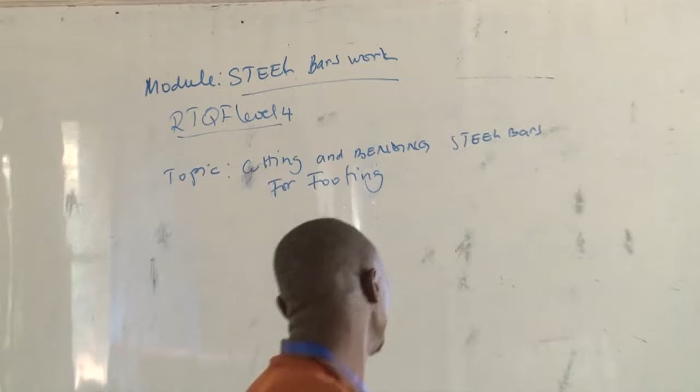Topic of today is about cutting and bending steel bars for footing. Yesterday we discussed about cutting and bending steel bars, especially for column. That's why now we are going to discuss about cutting and bending steel bars for footing.

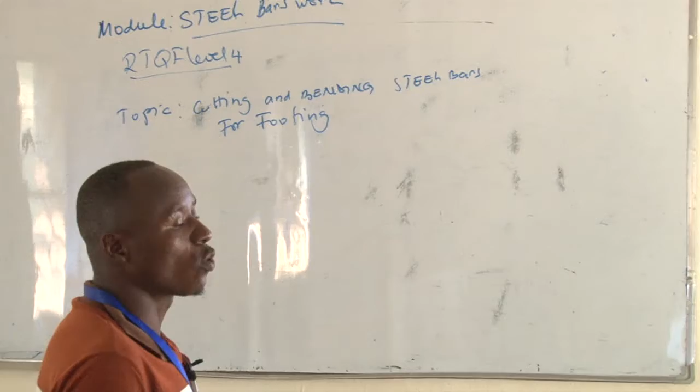Of course, there are some objectives for this course. At the end of this module, a learner should be able to know how to bend the steel bars related with footing. Now let's start with PPE to be used in steel bars work.

We have protective gloves, protecting our hands while we're working with steel bars. Then hearing protection, just to protect the ear from the noise.

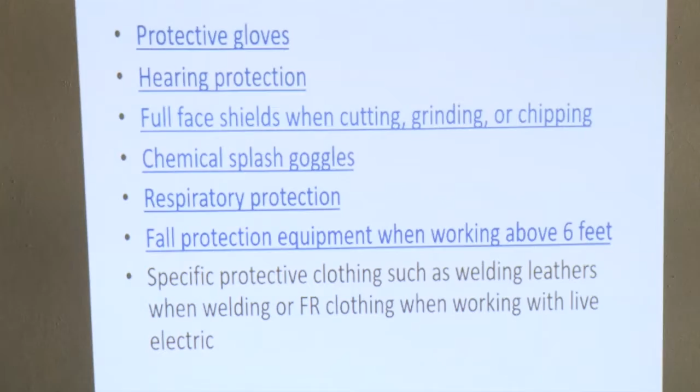Then full face shield when cutting and grinding, which also protects our face. And chemical splash goggles and respiratory protection.

Those are masks that we put on for respiratory organs in order to protect our respiration. These are the protection equipment used when working with steel bars.

Now let's discuss selection and use of tools and equipment for steel bars work. After protecting our body, now let's enter the work to select the materials or equipment to be used while bending and cutting the steel bars, especially for the footing.

Then the selection of tools. Let's start with classification of tools and equipment for steel bars work. It is what we call straightening tools and equipment.

Those are the tools we use just to straighten the rebars or reinforcement we use in construction. It is what we call hammer and straightening machine, the machine we use to straighten it.

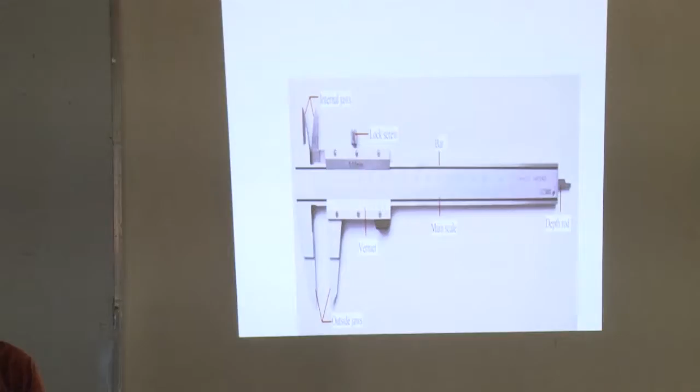Now, that figure we see on the projector is what we call a vernier caliper. The vernier caliper is used to take a measurement of a small thing, where you can't just measure by using a tape measure and other measurement tools.

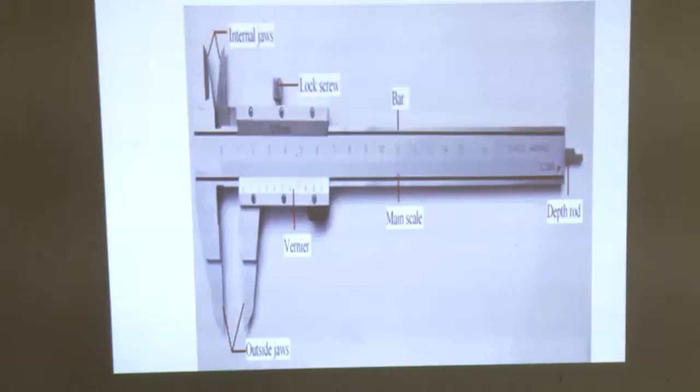It's called vernier caliper. Different types of steel bars: here in Rwanda we are using two types of steel bars, what we call mild steel bars and deformed steel bars, or twisted steel bars.

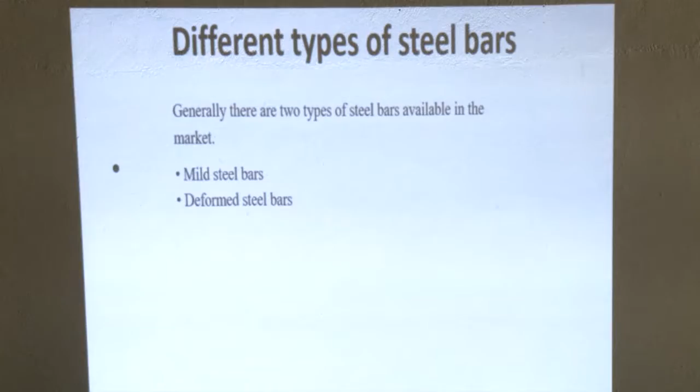Mild steel bars are the steel bars whose last surface is smooth. Whereas the deformed steel bars are the bars we are using whose last surface is somehow twisted.

Then, types of steel bars we are using. This mild steel, as I have said, mild steel bars are used for a tensile stress of the RCC, reinforced cement concrete, slabs, beams, etc. That is where we are using these mild steel bars, especially for reinforced cement concrete, slabs, and beams.

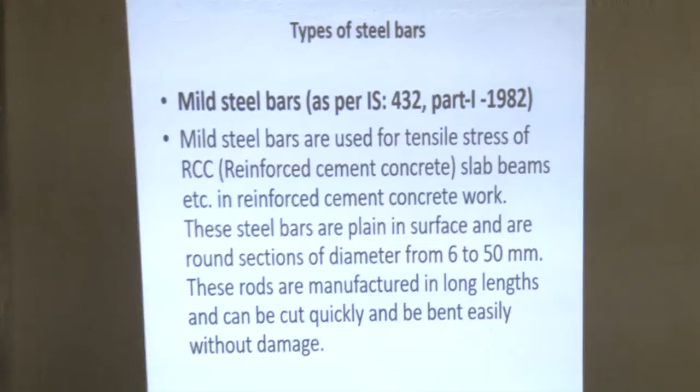Once we say slabs, it is like a pavement of the multi-story buildings. And the beams are horizontal members of the structure designed to support the structure from the slab and the load from up the beam.

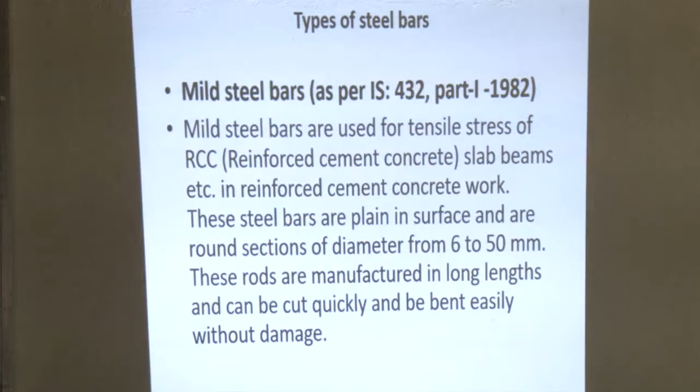Then let's go to the desired sizes of reinforcement we have found in the Rwandan market.

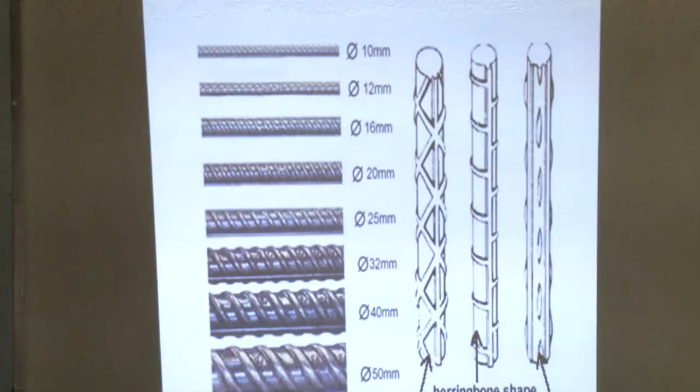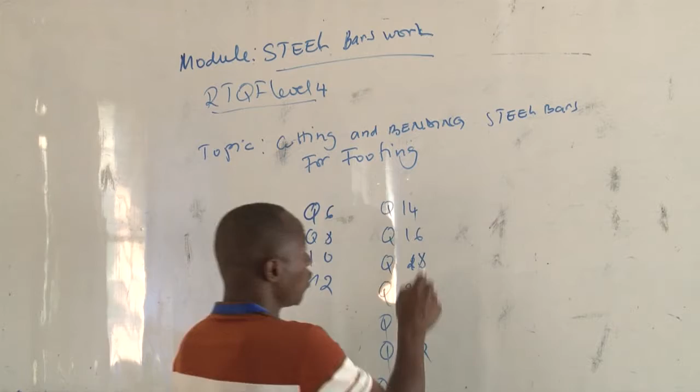At the Rwandan market, we are seeing different sizes such as 6, 8, 10, 12, 14, 16, 18, 20, 25, 32, and 40. Those are the sizes of reinforcement we are seeing here in Rwanda at the Rwandan markets.

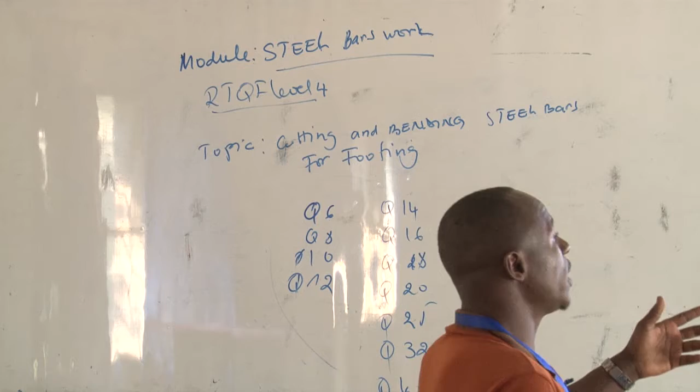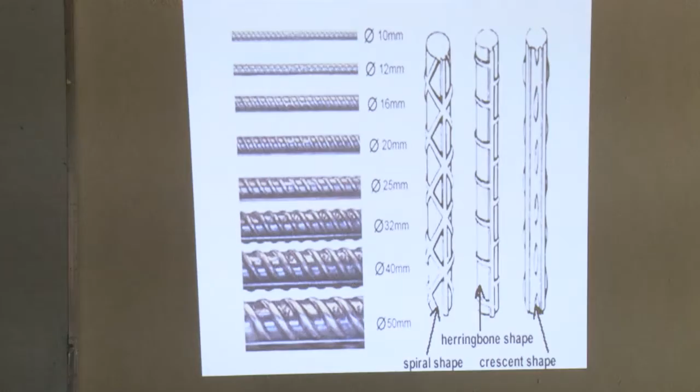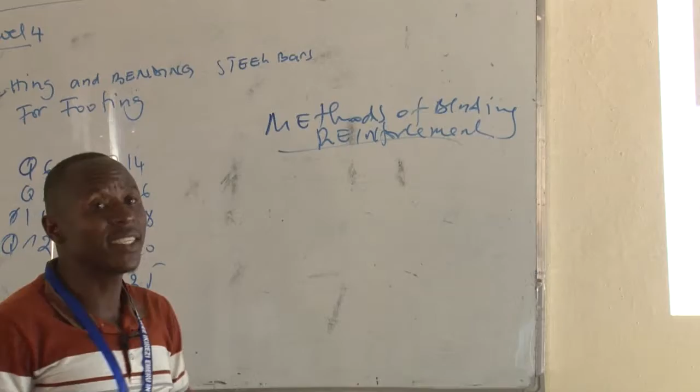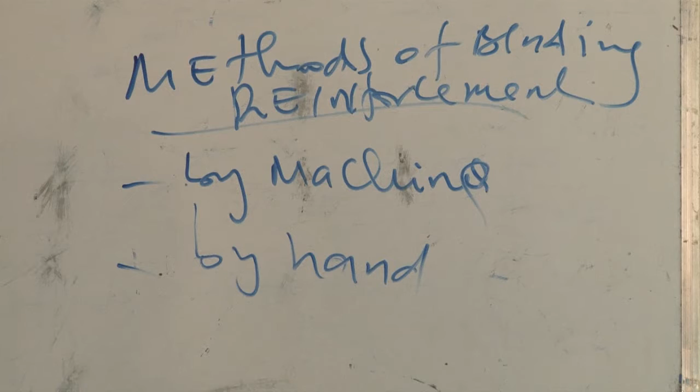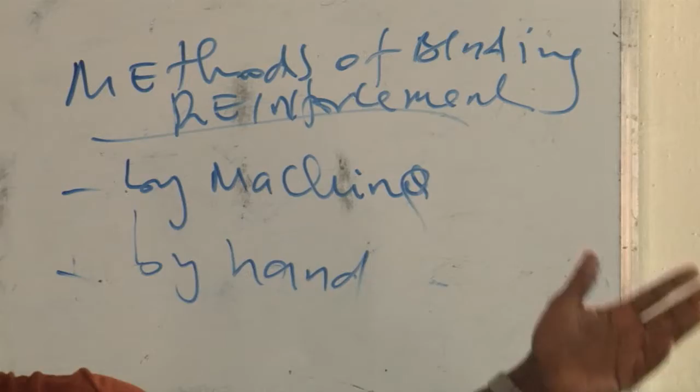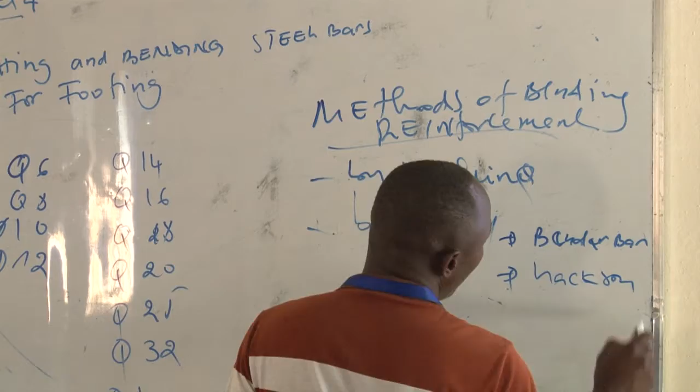The method of bending reinforcement is done in two ways. The first is by machine. The second one is by hand, where it is man-made, I mean. Now, by machine, it is done by those people using that bending machine. Whereas by hand, it is done using what we call bender bars. Bender bars and hacksaw, as you have seen in types of materials to be used. Then, now, let's go on.

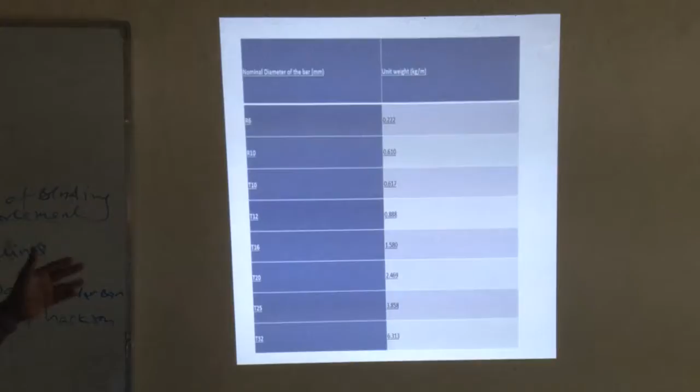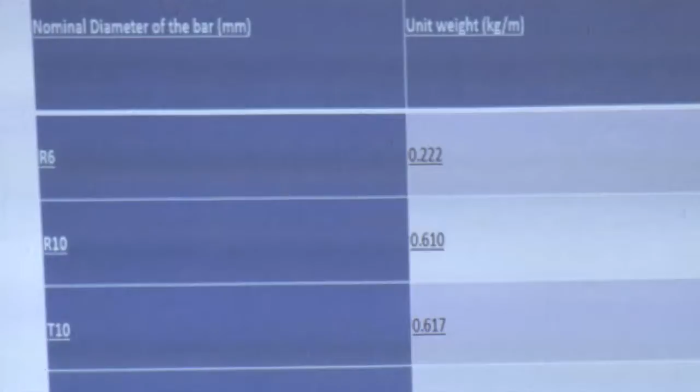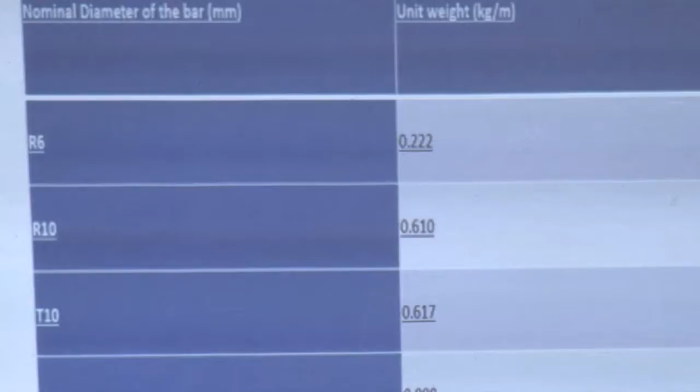Also, those are the sizes of reinforcement found at one market and their unit weight. For 6 reinforcement, it has unit weight of 0.222 kilogram per meter. For 10 reinforcement size, it is 0.617. For the steel of size 16, unit weight is that one. Also for 20, the unit weight is 2.469. For 25 it is 3.858. For 32 it is 6.31. Now let's go on terminologies used in steel bending and cutting steel bars.

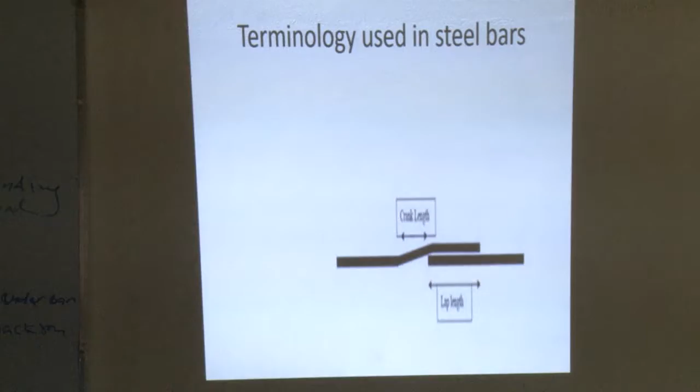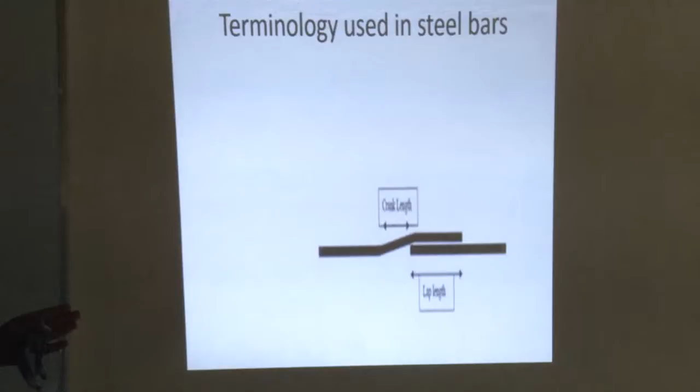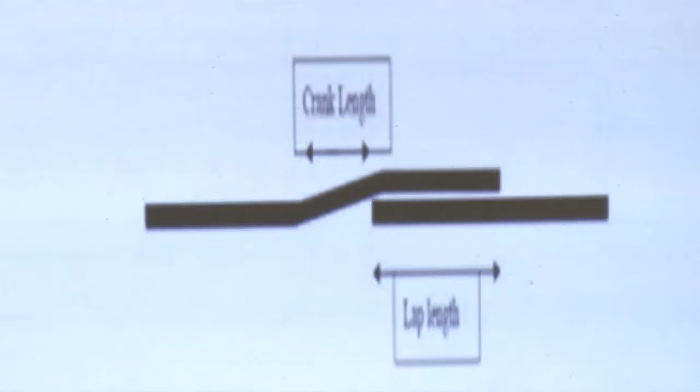Terminologies used. Here you are seeing the images. Those are just combining together, assembling together the two reinforcements. This one is what we call overlaps. What does it really mean, overlaps? Overlapping means just increasing the length of steel bars once your reinforcement is not enough to reach the desired length you want. That is what we call overlapping.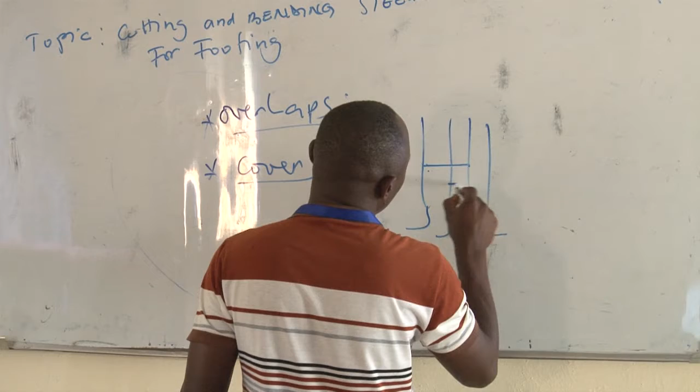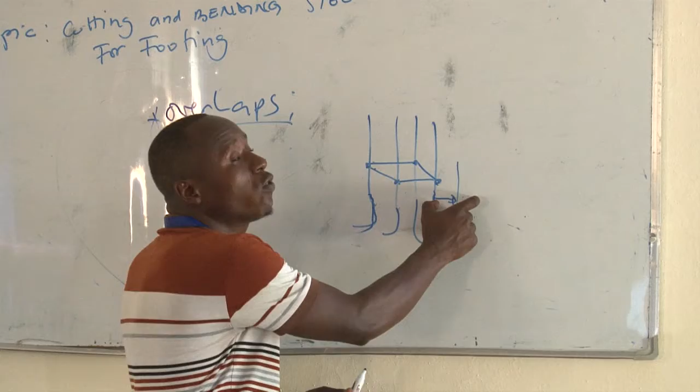The second one is what we call cover. Let me give you an example here. Cover is the thickness of concrete from the main reinforcement up to the last surface of the structure. To mean that it is the thickness of concrete after reinforcement up to the last surface of the structure is what we call cover.

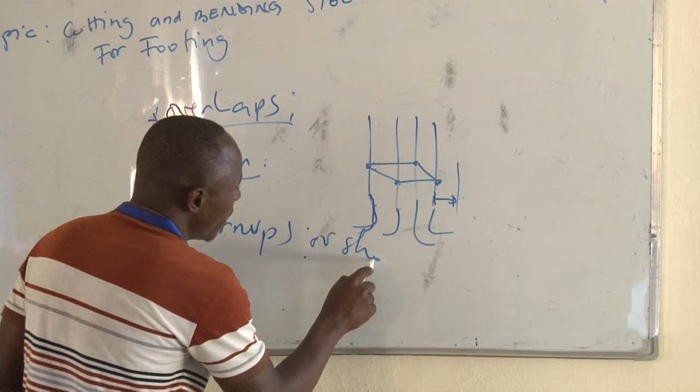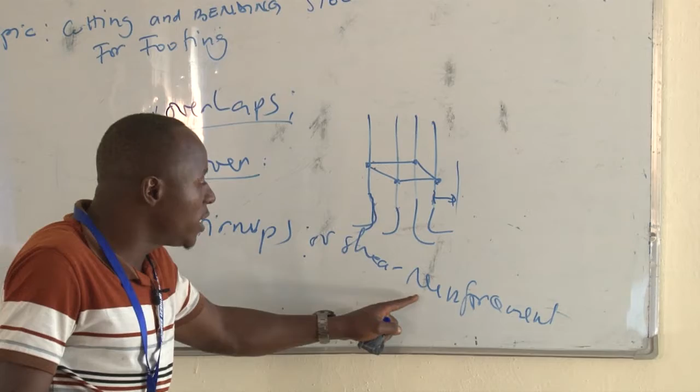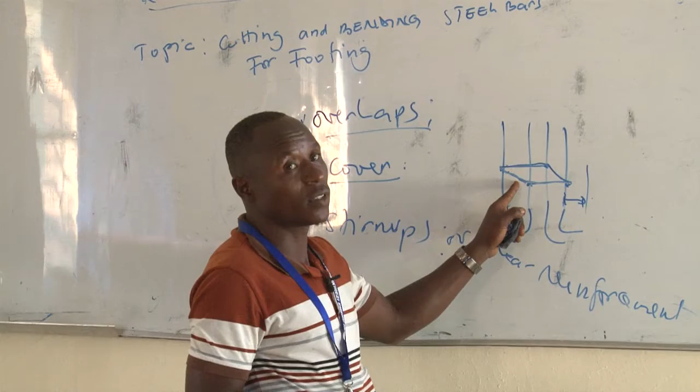And what we call stirrups. What really is a stirrup? It is called stirrups or shear reinforcement. Why do we call it shear reinforcement? Because it resists the shear force, to mean it resists the force which tends to cut it into two pieces. So stirrups, it is this one, in this sketch I've tried to draw on the board. It is used just to connect together the main reinforcement, to join the main reinforcement together.

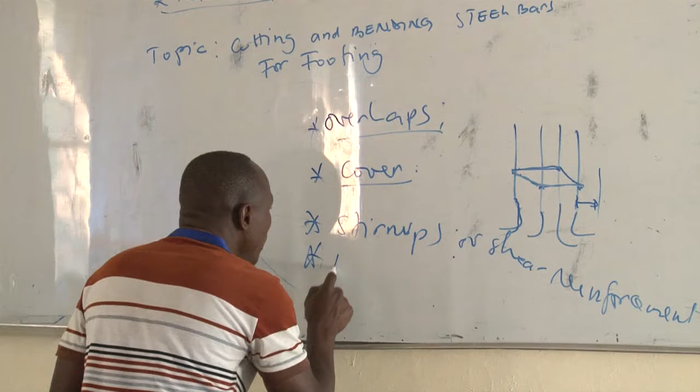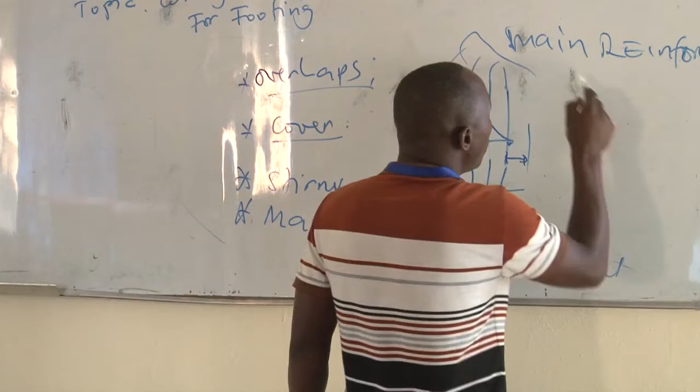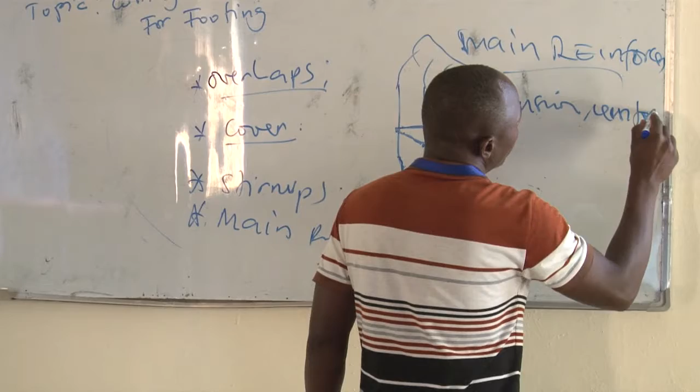What really is main reinforcement? The main reinforcement are the reinforcement we are using along the structure. For example, for this column, I used this one and this one and this one. Those are the main reinforcement. Among those main reinforcement, there is tension reinforcement and compression reinforcement. Tension reinforcement is ready to receive the tensile stress, whereas compression reinforcement are the steel bars ready to receive the compression force.

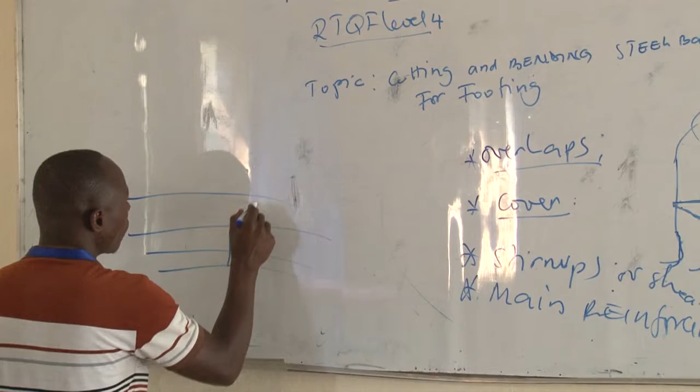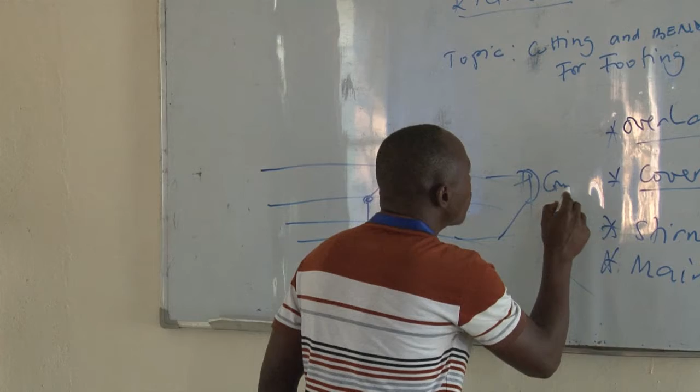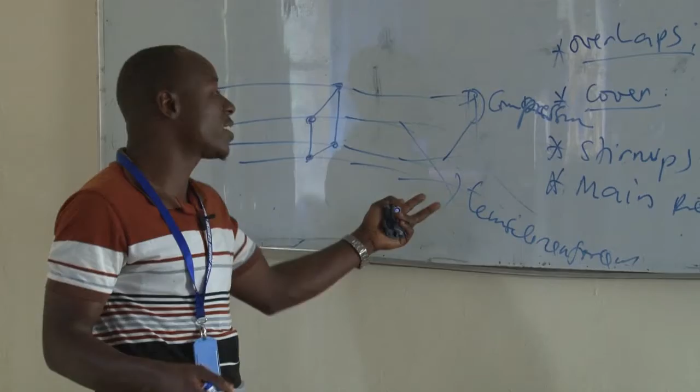I hope you understand the difference between tensile reinforcement and compression reinforcement. For example, if the structure is horizontal, this one at the top is what we call compression reinforcement, whereas this one and this one at the bottom are called tensile reinforcement. Instead of reinforcing at the top, of course, we reinforce more at the bottom, because the structure is likely to break down at the bottom.

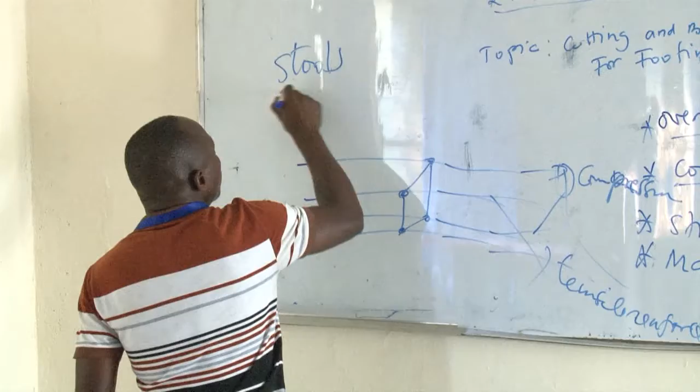Now, let's go on what we call the stool. What really is the stool? The stool is a reinforcement that we put between the two meshes, the bottom meshes and the top meshes. The reinforcement we tie to combine the top meshes and the bottom meshes is called the stool. When do we use these two meshes, the bottom meshes and the top meshes?

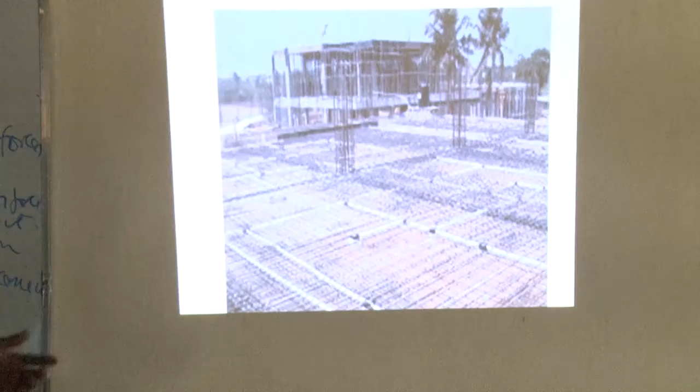It depends on the importance of the structure, or it depends on the behavior of the soil. Since the soil is weak, automatically you will double your structure with top meshes and bottom meshes. So the reinforcement you put between those two meshes is called the stool. Now, this is the image of steel bar work, where they are putting the stool between the top meshes and the bottom meshes.

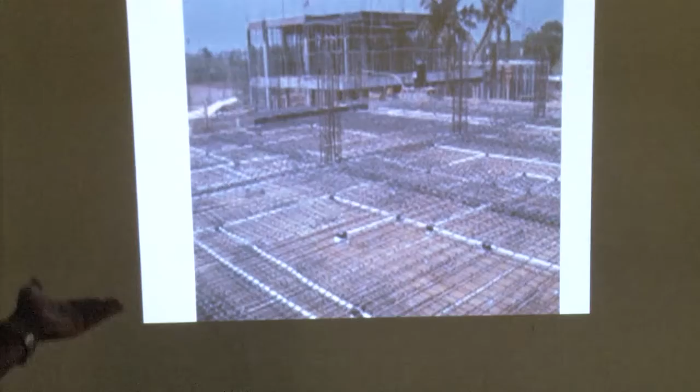So let's stop here and go to the practice to see the difference between cutting and bending steel bars work for the footing, and cutting and bending steel bars for the column. Yesterday we discussed cutting and bending steel bars, but for the column.

Today is about footing. What is really a footing? A footing is like a foundation of a column which is made in reinforced concrete. So that is what we are going to see there.

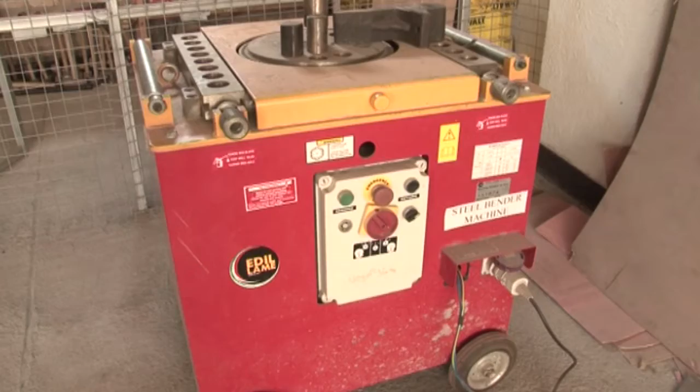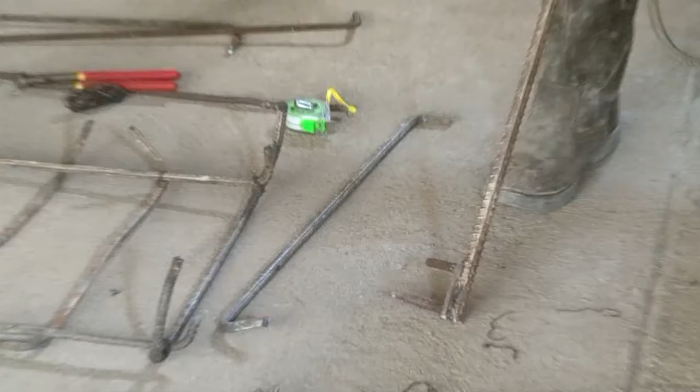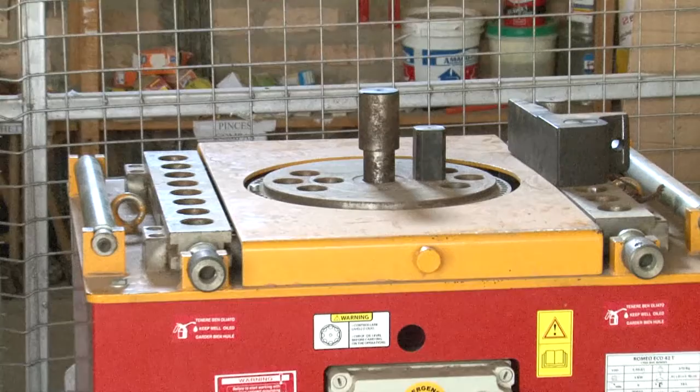We were in theory. Now in practice, we are going to see how to bend the steel reinforcement related with the footing. As I have said, you may bend the reinforcement in two ways: by hand, where we use bender bars, this one, and by machine, where we use this one, the bending machine. But for us, we prefer to use this machine because it is more accurate than using hands.

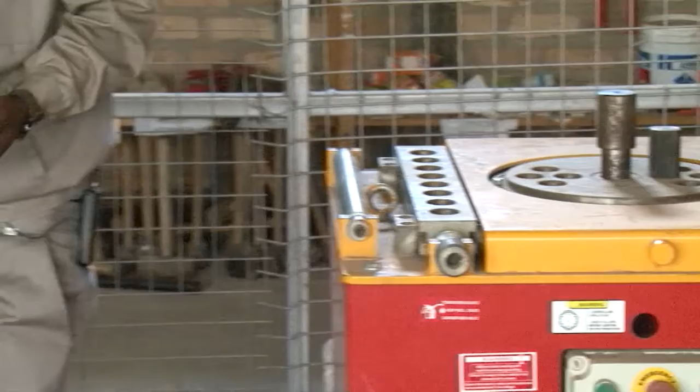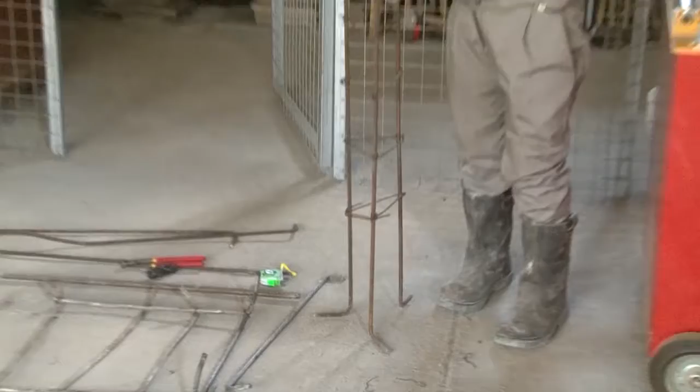So we are using this machine to make hooks. For making the stirrups like this one, it is done by hand. But for making those hooks, it is better to use the machine, because sometimes you may bend reinforcement sized around 25. It is somehow hard, so bending them by hand is difficult. So it is better to use the bending machine.

So today, let us try to bend those reinforcements of the footing.

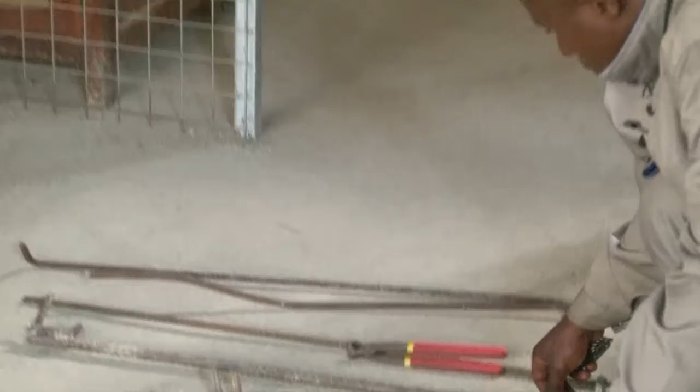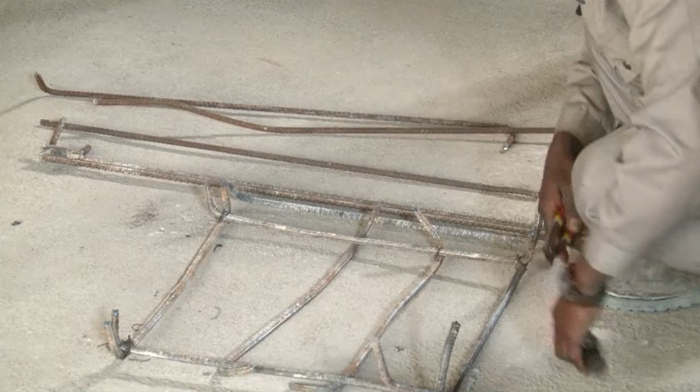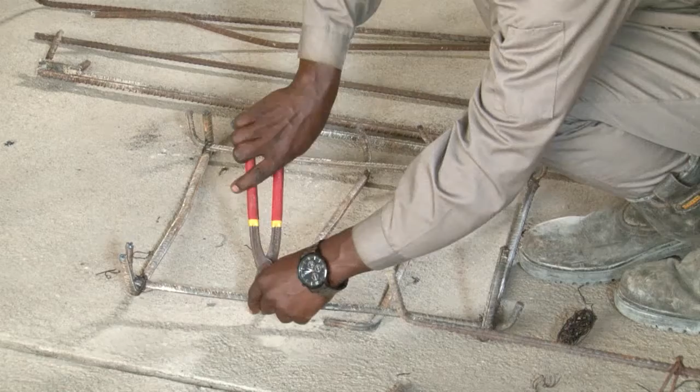In tying them together, of course, you need to tie them by making an 8, in order to tie them together as expected, so that your reinforcement is more rigid and can't come apart.

This one I'm using is called the pliers. It is often used at the site, and these are called wires. I use them just to tie them together.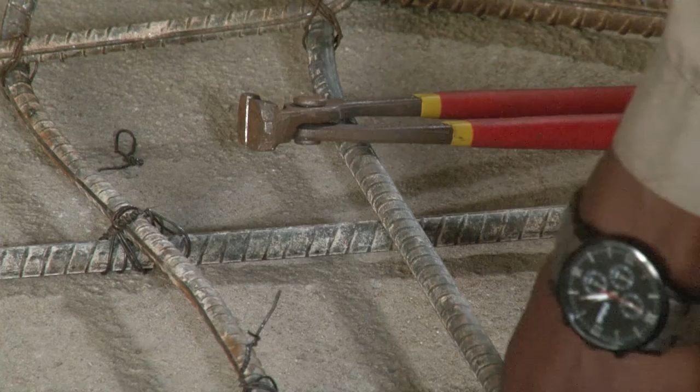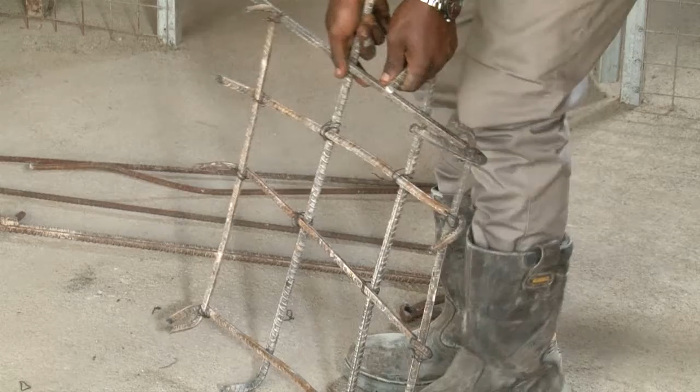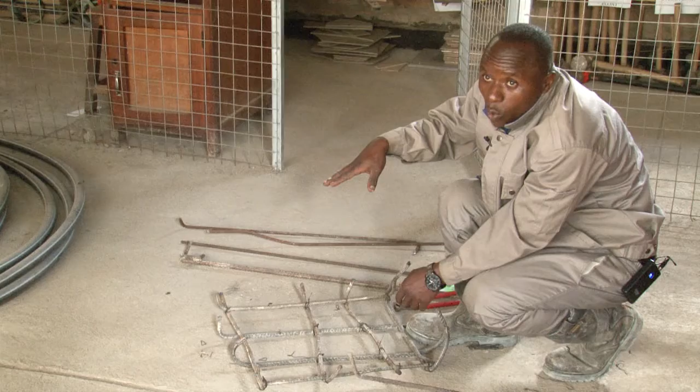Now, these are the meshes used for the footing. And I told you, once the soil is completely weak, of course, we are obliged to use double meshes: the bottom meshes, this one, and the top meshes. To combine them together we use what we call the stool. To combine these meshes and the second one, we are obliged to put the stool between those two meshes.

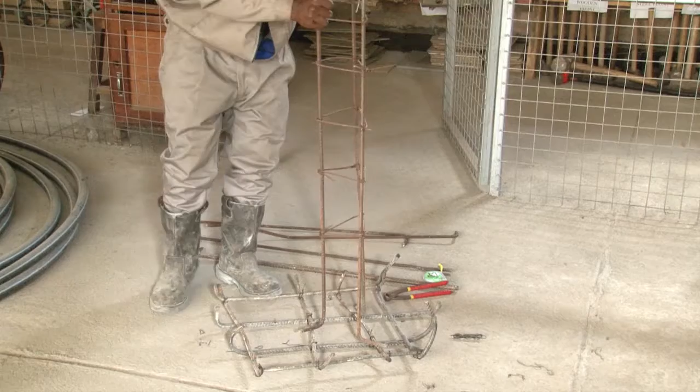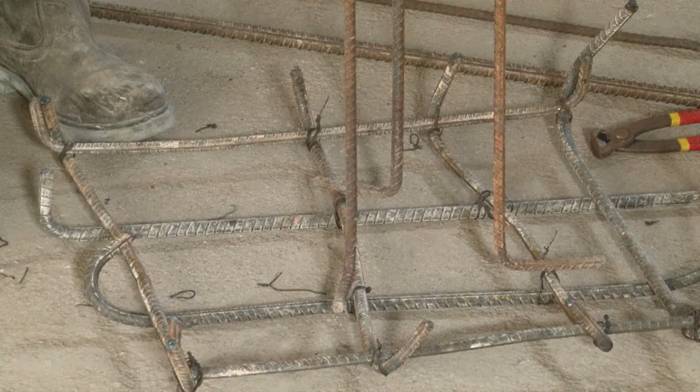So after that, we put this column reinforcement. It is done like this in order to prevent the settlement of your structure. So the practice of today was just to see this. The previous session was bending the steel bars for the column. Today it is about this one, for the footing. Next time, we will see how to make the formwork of those structures we have seen.

So before closing the session, remember the objectives. The objective was to clearly bend the steel bars of what? The steel bars of the footing. I hope those who have followed as expected have achieved the objectives.